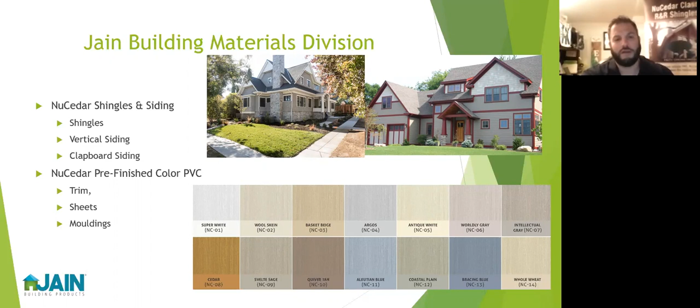Most folks today identify the NuCedar product with the shingles. We offer the shingles in a 13-inch shingle for a 5-inch exposure at the greatest. We also have an 18-inch shingle for a 7-inch exposure at the greatest. The 18s can be installed at a 5.5 or 7-inch exposure, but those are the only two exposures this product can be installed at.

We have a 13 for a 5-inch exposure if someone's trying to replicate a more traditional cedar look. The shingles are sold by the quarter square at their max exposure—so the 13s at a 5-inch exposure, 4 boxes to a square, or the 18s at a 7-inch exposure, 4 boxes to a square. There are 5 different widths to a box: the 13s will have 4 through 8-inch widths, and the 18s will have 5 through 9-inch widths in your box.

The beautiful thing about the NuCedar shingles is they install almost identical to a cedar equivalent. The other unique thing to the NuCedar shingle product, and all of NuCedar's products, is that they are milled. Because we're milling PVC sheet goods and PVC cuts the same as traditional cedar, we can utilize the same capabilities found in a modern cedar mill to mill PVC into the same historical and architectural profiles you'd find in cedar. So you're not compromising aesthetics by going to a maintenance-free product.

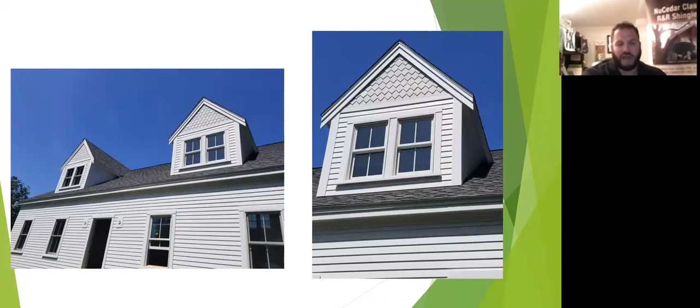Here you can see the fancy cuts in super white up in the gables on these dormers. So for those accent areas that architects are putting into their plans, we can accommodate them. Here you can see the fancy cuts in the Argos shingles, in rough sawn, in the diamonds.

The NuCedar shingles are true to history with the innovation of PVC and a solar reflective coating that doesn't compromise aesthetics for maintenance-free performance.

You can see here on the 2013 HGTV Dream House, this is in Royal Indigo, in Indigo Park, outside Charleston on Kiawah Island. Royal Indigo is the builder; Indigo Park is a full LEED Platinum development. There are 18 homes with NuCedar.

This is our 13-inch Svelte Sage shingle at a 5-inch exposure. You can see it here with woven corners. That dormer up top would be a great example of where they would use the Fill & Flex adhesive. It's a hot spot area, going to get tremendously hot, tying into that metal roof in the South Carolina sun.

They also used our pre-finished trim boards throughout the carports here—another nice thing that they do a lot in that market.

Here we have worldly gray shingles, a 13-inch shingle at a 5-inch exposure, done in elliptical arches and woven corners. This home was on the cover of Charleston Home Design Magazine in 2017, spring and summer.

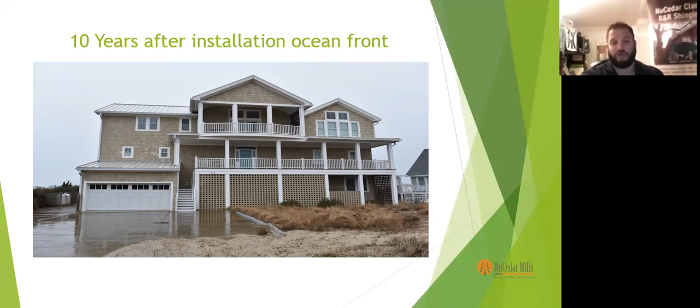The unlimited possibilities working with this product really lead to that skilled craftsperson being able to show off their craft and do things like waves in the gables, like you're seeing here in our Argos shingles, and eyebrows here in our Cedar shingles, our 18-inch shingle at a 7-inch exposure.

I always send homeowners to this house here in the Delaware Beaches and get the same response. They call me and say, 'Ray, why'd you send me to a cedar house?' And I say, 'No, that's NuCedar. If you have to smell it to tell whether it's real or not, then it passed the aesthetic test.' You can say that with conviction with this product all day.

So here you can see Argos shingles with the eyebrows, this job was done up in the Keowee Reserve outside Clemson.

This is the only exception to the rule where they're using more fill and flex adhesive than in the first 4 courses. This was above a copper roof, so they had to use the fill and flex on every shingle and fasten it, because in these gables, that copper, before it patinas, is going to put off a tremendous amount of heat onto that sidewall. So they were fastening and adhering every single shingle. Above a copper roof is the only exception.

Again, you can reach out to myself or some of the other NuCedar representatives to help you identify the hot spots. Send us a set of plans, we'll highlight them, and we'll talk to your contractors about how and where to apply the fill and flex.

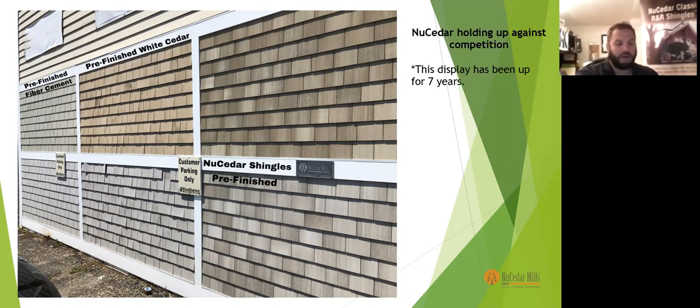You don't have to keep maintaining it, and it will retain its variegated and natural quilting effect, whereas the more you paint and stain traditional cedar, it gets flat, it gets dull, and you just have to continue to sand down and maintain and repaint. So a lot of upkeep. The NuCedar products also meet a Class A fire rating, meaning it'll self-extinguish when the flame source is removed. That's another unique thing you will not get out of traditional cedar. Not to mention, it's impervious to insect infestation, wood rot, and all the other things you'd run into comparing it to cedar.

We offer vertical profiles in smooth and rough sawn textures. The verticals are milled from 5/8 thick material. We have standard 16-foot lengths.

So you have a board and batten system where you have an individual board and an individual batten. It's not a panel. Here you can see it in basket beige in the smooth texture. The boards are gapped 1/4 inch. They're 9 1/4 inch boards, and then you're running a 2-inch by 3/4 inch batten strip on top.

The idea is that we introduced a screw and plug system with PVC back in 2012.

For the longest time, manufacturers of PVC were telling folks in the field, well, you put your boards together, you nail, you putty, and you touch up. Well, the problem with that is when PVC goes through a 100-degree temperature swing, a 16-foot board can move as much as 1/4 inch in each direction. That's a lot of movement. So nail heads pop, gaps separate, boards buckle, and you have issues.

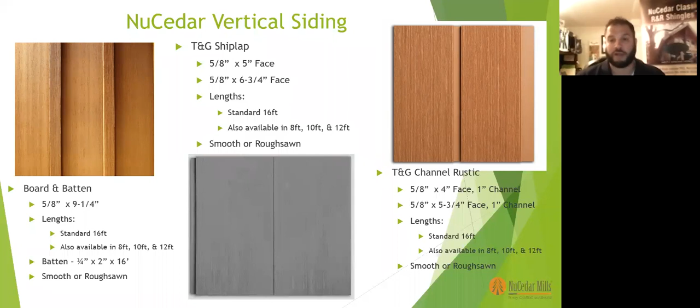Again, the drill bits, the stainless steel screws, the plugs are all included in this system. So whether you're getting one board or a full job lot, you're going to find all the fasteners are included. We have a new modern shiplap profile that we added to the line.

The modern shiplap is available in a smooth and rough sawn texture. You will call out what size face you want, 4, 6, 8, or 10-inch face. You will call what size gap you want, a flush 1/8 of an inch, 1/4 inch, or 1/2 inch gap, and then one of our 14 standard colors in smooth and rough sawn texture. Again, all the screws and plugs are included in this system.

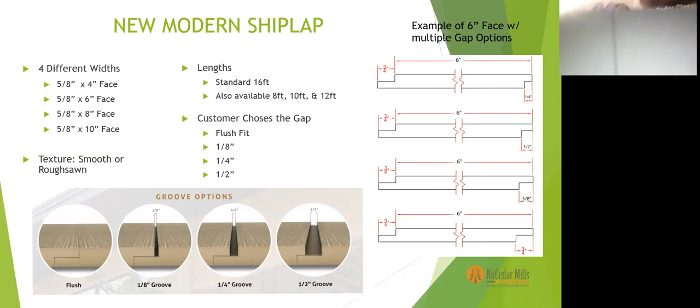You can see it here when you put the 2 pieces together. This is an 1/8 of an inch gap, a 6-inch face. So you can see when you put the 2 pieces together, you get that 1/8 of an inch gap consistent all day. Where a lot of times in the past people were trying to achieve this look with our tongue and groove, they were having to set that gap consistently and have a storyboard to keep that gap consistent from one board to the next. So this really just saves a step for the installer. It also gives a watertight, flush finish when putting the boards together. It can be run horizontally or vertically, it's just imperative they follow the fastening schedule.

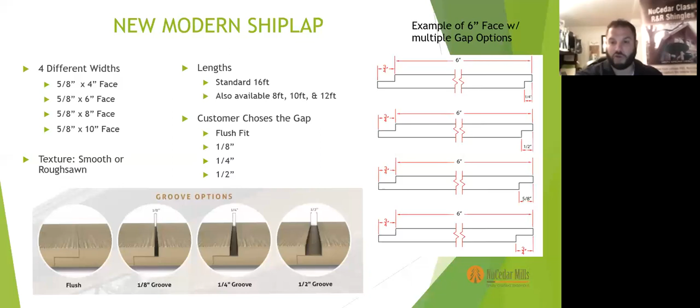If you have runs and you're running it horizontally that exceed 16 feet, you're going to have scarf joints. You're not going to butt the two boards together, you will simply scarf them together with a 45-degree cut. Depending on the temperature outside will determine how large of a gap you leave in that scarf joint. If it's less than 30 degrees, leave at least an 1/8 of an inch gap. A 1/16 of an inch gap if you're between 30 and 50 degrees, and above 70 degrees, you're pretty much running a 32nd of an inch gap, if that. You can pretty much put the boards flush together.

We have a fill and flex adhesive that I mentioned with the shingles.

It's to be utilized in the scarf joints only, and that's really to prevent moisture from getting back into that joint. So you can use fill and flex in that joint.

It's paintable. We supply the touch-up kit for every 6 squares. There's 4 ounces of touch-up and an applicator to apply it, just another thing you can use. All the screws, plugs, and drill bits are included in this system.

You can do the vertical sidings in custom colors as well. Custom color protocol is the same: you send Garden State Lumber a purchase order with the color name and color code, and as long as the LRV is 20 or higher, we can produce it with our 25-year transferable warranty. You could also send us a color to match on a flat surface of wood or PVC, and we can match any color that way as well.

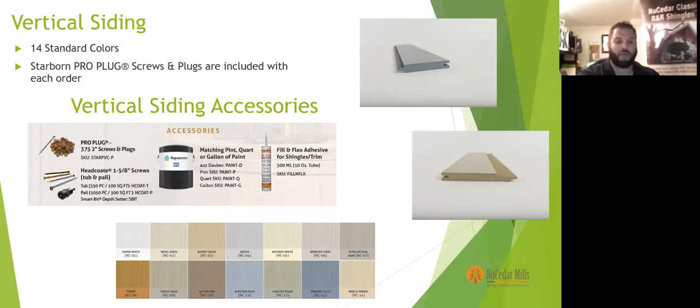Keep in mind the vertical system is available in smooth and rough sawn textures. It does great for renovations for homeowners who have existing cedar all over their house and aren't willing to compromise the aesthetics to go to a fiber cement or vinyl product. The NuCedar product gives them the aesthetic look of traditional cedar but takes care of their maintenance issues.

Keep in mind that the rough sawn texture, like our shingle, will have a little bit of variation from board to board. You won't see as much variation as with the shingle, but you will see some lighter and darker tones within that color. So if you're looking for a very consistent color, order smooth with the verticals.

The vertical profiles can manipulate corners in the field and stack them like a woven corner, like our shingles, or we have pre-finished corner boards available in 3 different textures. They come in 20 footers standard, and you can also get them with a J pocket on them if you prefer. They come in smooth, rough sawn, and embossed wood grain textures.

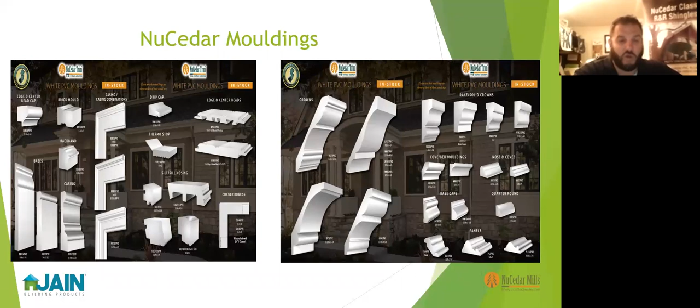We have 21 different molding profiles that also can be pre-finished. They're in stock at Garden State in just raw white, but if someone's looking for them pre-finished to beef up their color trim, we can do that as well. And you're looking, again, about 2 weeks, 10 business days for standard colors for trim from the time that it ships. And you're also looking at about 4 to 5 weeks for custom colors.

You also can see it ties in nicely with other products. 9 of our 14 standard colors will cross-reference with HardiePlank colors, with Allura colors. So if someone wants to run traditional cedar, we also have colors that cross-reference with Maibec and SBC white cedar, pre-finished white cedar. So if you want to run our color trim with someone's traditional white cedar, like you're seeing here on Roger Goodell's house, he used traditional cedar, but he used our basket beige trim on his full exterior.

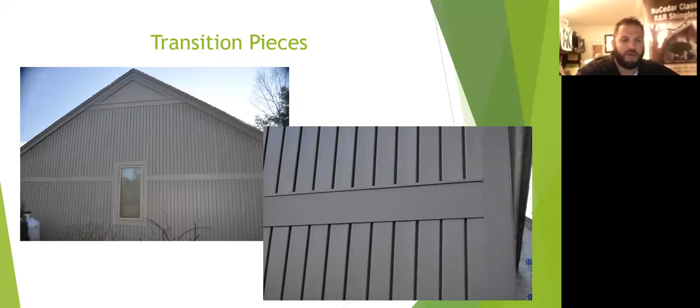And it's just NuCedar in various different types of applications.